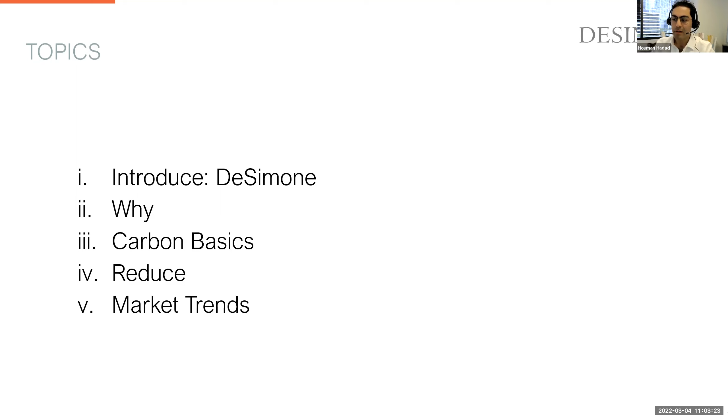So what we're going to be talking about is some introduction of the firm and myself. Why do we want to reduce embodied carbon? Some talk a little bit about carbon basics. Where does the embodied carbon come from? How to reduce it, and eventually some market trends and what is going on in the world that we live in right now in the construction industry.

DeSimone Consulting Engineers, we are at the core a structural consultant company. So what we do, we design structures — that has been historically the core of the firm, and even today the majority of the work. But we've been expanding into other areas, including structural design, facade consulting, forensic engineering, risk management, and other areas.

I'm very glad that at least for people that are in Miami, which I think is the majority of the audience, a lot of buildings that you know by name, including 1000 Museum by Zaha Hadid, Panorama, Paramount, Flatiron, the Twisting Tower of Grand Bay, and many more have been work of our company at the end. So we kind of helped shape the Miami skyline to some point, and I take pride in that.

So why do we want to reduce embodied carbon to begin with? If you think about traditional structural design criteria, we are trained to think about safety — by safety I mean occupant safety, against seismic events or hurricane winds or even gravity load. If you have a pool on top of the structure, you have to support it. So safety. Then you have cost, schedule, and constructability that go hand in hand. A project has to be economically viable to be built, a development, and then it has to be good to be constructed at the end of the day. And aesthetics goes without saying — no one wants an ugly building. So this is what we traditionally had.

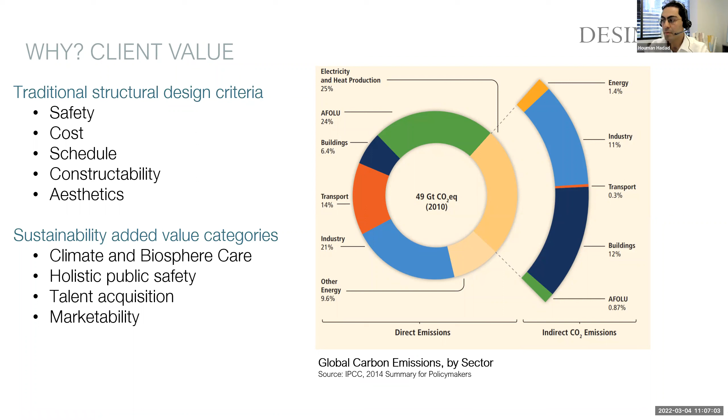The graph on the right shows the building sector is responsible for a good amount of carbon emissions, CO2 emissions. So if you're responsible for a good amount of it, we probably have some levers to pull to reduce it also to a good degree.

And then I go to the SE 2050 challenge. That is a challenge started by the Carbon Leadership Forum. If you're not familiar with Carbon Leadership Forum, Google it, go dig a little bit deeper. They have a lot of good information, a very well set up website, and it's very educational, really. So Carbon Leadership Forum started the SE 2050 challenge. The goal is to go zero embodied carbon by 2050.

And then ASCE SEI adopted that challenge. And now there are signatory firms that basically pledged to that challenge. Our firm is one of them. That list has grown ever since I had the list on my desktop, and a lot more companies are joining the movement, essentially.

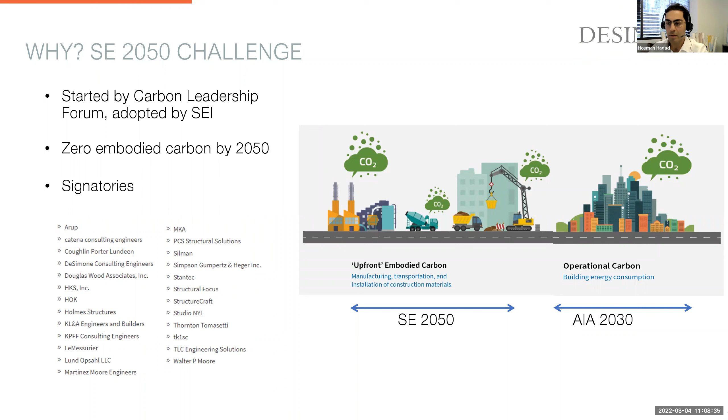I want to make a note here that today's topic is going to be about embodied carbon. By embodied carbon, we mean the carbon that has been released by producing the material that goes into your structure. We're not here to talk about operational carbon, although it is very important. But I think as a structural engineer, you have less impact on operational carbon. Operational carbon is the energy you use for cooling, heating, air conditioning, all the electricity used in a structure. We have more influence on the embodied carbon, on the material that is used to build a structure, essentially.

Now, let's talk about some carbon basics. I want to talk about three different materials that are most common in construction: steel, concrete, and wood, as three different structural systems.

First, we go to steel. To make crude steel, there are three different approaches. One is basic oxygen furnace, the oldest one. The way you do it, you have the iron ore, and you add coal, coke, limestone, and other stuff to it. You essentially burn fossil fuels to heat it up and melt it, and at the end you blow some purified oxygen into the mix to manage the level of carbon in the metal that comes out of the furnace, and that's how you have your crude steel.

The other more recent technology is DRI, or direct reduced iron. What you do is you're not burning fossil fuel anymore to heat up. You add stuff, you have direct reduced iron, and eventually you can add recycled steel, and you go to electric arc furnace, which heats up using electricity.

And then there's a third way of making steel, which is just recycling steel. The steel that has been used, you melt it again in an electric arc furnace, and you make new steel out of it, hot rolled shape, right.

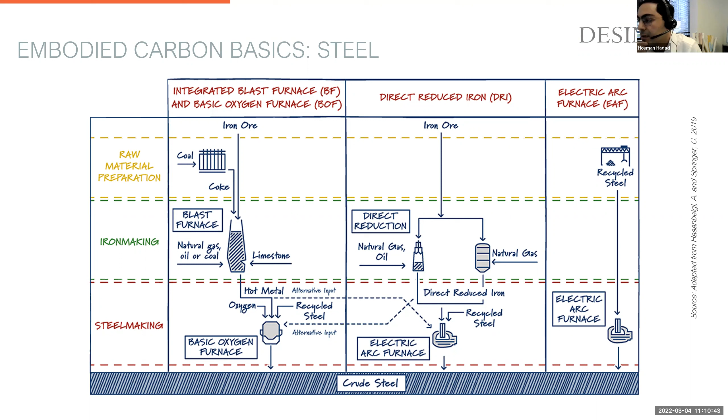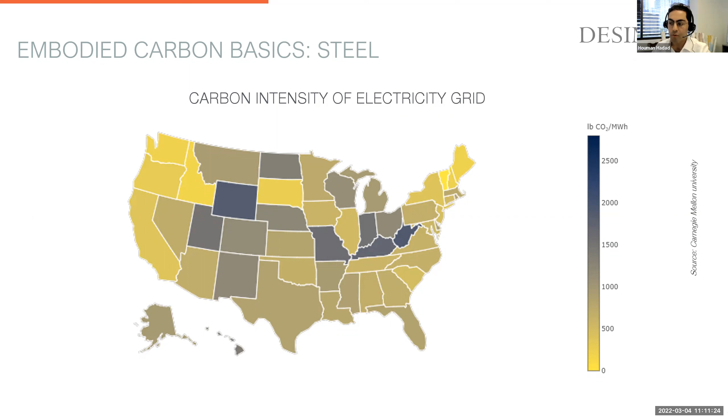Another thing to remember is that electric arc furnace consumes electricity to generate heat. So therefore, where your plant is, where your steel mill is located, is very crucial. Are you located in a state that has a clean electricity grid, like the West Coast or Pacific Northwest, or, as you can see in this graph, the Northeast region? The yellower in this graph, the cleaner the electricity grid system. Or does the mill happen to be in one of the states that is more carbon intensive, including the Midwest? That changes a little bit the equation of the steel at the end of the day.

Let's talk some numbers. For steel, on average, we have 1.16 tons of CO2 released per ton of steel produced. That is a high number. Reality is, for every pound of steel you make, you are making more than a pound of carbon dioxide and releasing it into the atmosphere.

That is obviously subjective. It depends on the technology, on the mill, where the mill is located. The number changes. A lower bound is 0.7 for a mill in the Seattle area in the Pacific Northwest, a Nucor using the latest technology of electric arc furnace. It can go higher for older mills still using the basic oxygen furnace.

Also, based on what steel shape you're using, the numbers change. To produce reinforcing steel, the rebars, it's usually made with electric arc furnace, and it's usually less intensive in terms of shaping and rolling. That gives a number close to 0.9.

I know that all of the W shapes in the United States are produced with electric arc furnaces. But when you go to cold formed steel and steel deck, it's mostly still produced with basic oxygen furnaces, and those are more energy intensive. So depending on what shape you're using in your design and where you're sourcing the steel from, the numbers can change very significantly.

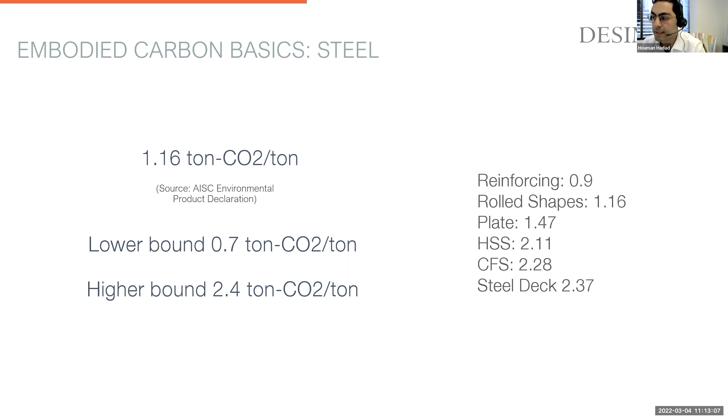From steel, let's switch to concrete now, and talk a little bit about cement. Again, we're just talking about carbon basics here. We're interested to know where the carbon comes from in each of the materials we mentioned.

So in concrete, what is the paste, the binding agent? That's the cement. To create the cement, you have to mine the raw material, make the cement from the clinker and cook it, then mix it in the ready mixer and transport it to your job site, and that's how you have concrete. The first two processes, mining and cement manufacturing, are responsible for 70 to 90% of the embodied carbon of concrete overall. So let's dive a little bit into cement manufacturing.

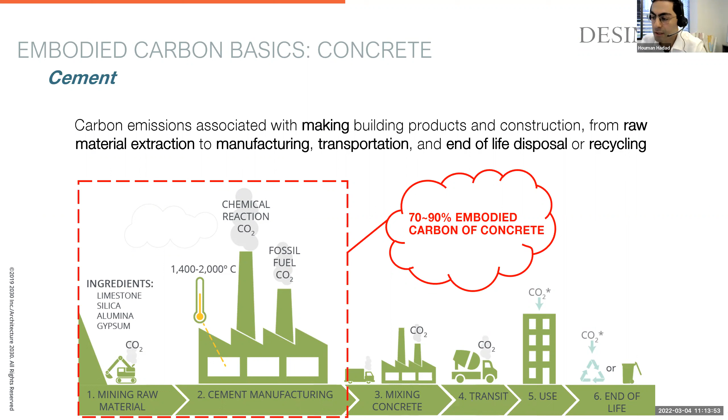Cement manufacturing starts with raw material. You have to crush it, dry mix it, then preheat it, cook it in a kiln, cool it down, store it, crush it, bag it, and then it goes to the customer. It's a little bit similar to how you cook a steak, really. You pre-season it, take it out of the fridge so it gets to room temperature, cook it, cool it down, and eat it.

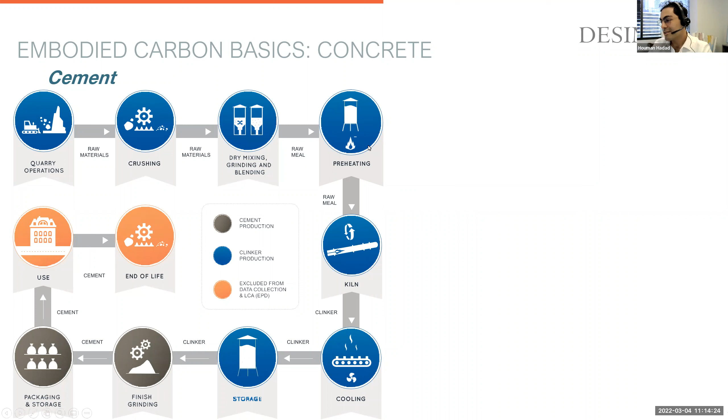For the two processes of preheating and cooking the cement, you have to generate heat. It's mostly either coal, or recently it's become more common to use gas, nuclear energy, and other sources like wind energy. So that's one way that you're releasing CO2 in the process.

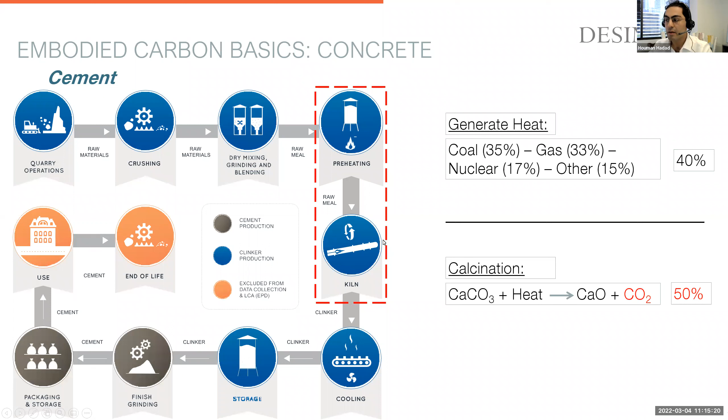The other way is through a chemical reaction, calcination in the kiln. When you're cooking the limestone, you release CO2 as an unwanted byproduct, and you end up with lime. That also releases CO2 into the atmosphere naturally, and that's sometimes more than the CO2 consumed just to burn or heat up the kiln in the preheating process.

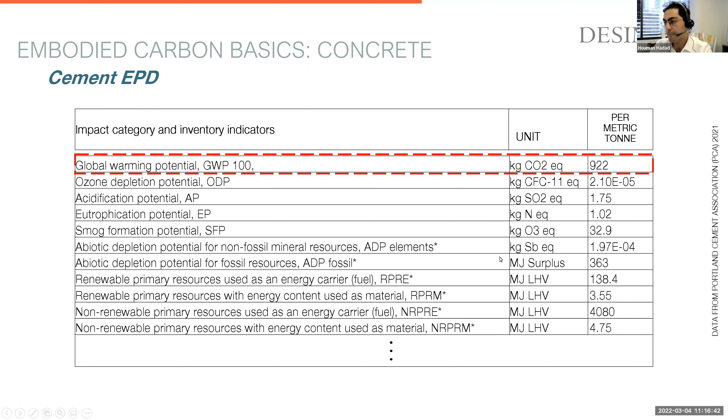Now from cement, if you want to go to concrete, concrete is basically a blend of cement and other materials, including the aggregates, the water, and other admixtures.

So a ready mixer essentially knows exactly how much of what material goes into a concrete. And they have EPDs for every single one of these ingredients, and they can do the math and come up with an EPD for the specific mix of concrete that is being released as a batch to a job site.

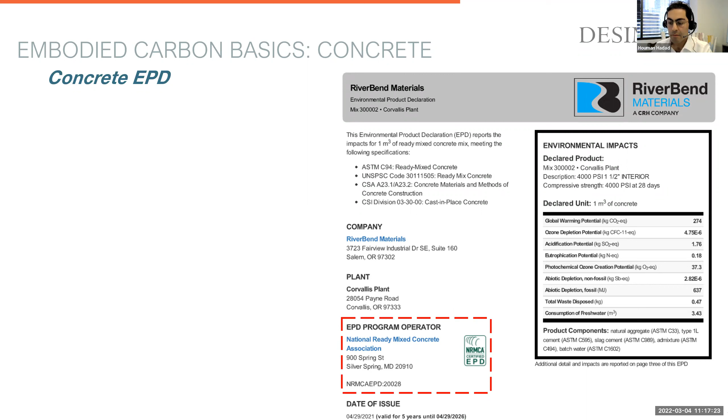Even better, they report all of that data to NRMCA, which is the National Ready Mixed Concrete Association, the association that really represents all of the concrete manufacturers. So NRMCA gets all of that data and creates a big, nice database, which is the national average.

EPD for global warming potential for cement and concrete around the country. They do that by having different classes of strength for concrete, and different cement replacement levels. Was it up to 20% replacement of fly ash? Was it up to 30%, 40%? Was it more or less? And they associate one average number to every one of these categories.

And these numbers are very important because eventually any of the LCA softwares that are working right now in the United States, they mostly rely on this data for the average of global warming potential for concrete.

Life cycle analysis, or LCA, that I mentioned before, is a very simple process at heart. What it is, is that you have quantities of materials and you have carbon intensity associated to that material. You multiply these and you do that for every single element of concrete, steel, whatever member that you have in the structure, and you add it all up to see how much carbon you're consuming for that project.

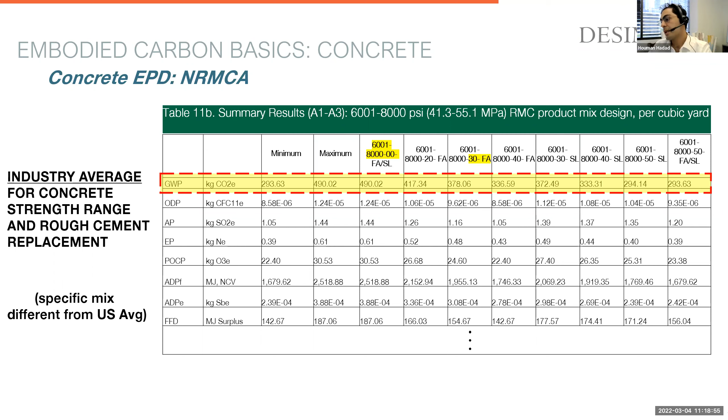So that was for concrete. Now, the third material that I want to talk about is wood, third structural material, which is becoming very fashionable these days, and a lot of people are interested in it.

The processing of lumber or wood is that you have harvesting, you have logging of the wood, then you essentially transport it. It goes through the process of milling. In the milling, it has to be debarked, rough cut, stacked, and then it's dried, either kiln dry or air dry, depending on the mill. Then essentially it's transited and ready for use in your structure.

If you want to talk about numbers of carbon intensity for wood, reality is that a lot of people say that wood is either carbon neutral, zero carbon, or a lot of people argue that wood, because it stores some CO2 during the natural life of the tree, they call it sequestration, is actually carbon negative, right?

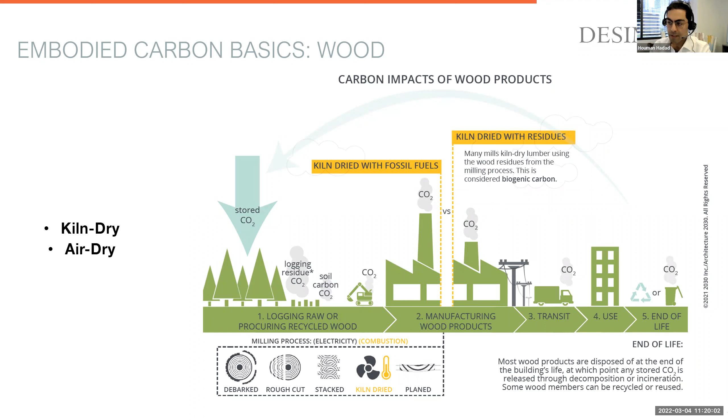There is some argument there because of two things. First, the wood that you're consuming has to come from smart forestry practices. It cannot be wood that results in deforestation. That's number one, and we're not even talking about carbon emissions yet.

Number two is that during the process of logging the wood and also disturbing the soil, some CO2 is released. How much is it? Definitely much less than what concrete and steel release, but it's not zero, it's some amount. And then essentially there's another argument that at the end of the life cycle of wood, either it decomposes or it ends up being burned if it's not recycled properly. Either of these two releases the CO2 that wood has been absorbing throughout its life.

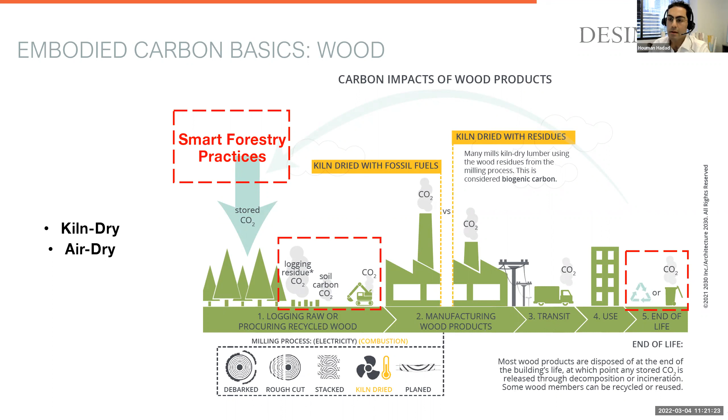So there's an argument that, all right, we cannot take every single wood that is in the market as carbon negative. It has to be a little bit more scrutinized. It has to be studied a little bit more and see how it is. But the fact at the end of the day remains that wood, compared to concrete and steel, is not as carbon intensive as they are. Maybe it's not zero, maybe it's not negative, but it's definitely not 1,000 kilograms of CO2 per ton of wood produced.

So now we talked about three different materials and how carbon intensive each one can be. From there, I want to talk about some reduction strategies in the real world. We have a project, you have a client, you are the structural designer, they come to you, and there's a goal of reducing carbon in this project. There are some general decisions to be made and some material specific decisions depending on the structural system to be made. In general decisions, I think the most important is to understand the team dynamic and reasons behind the reduction, right?

What is driving this project to reduce embodied carbon—either 10%, 20%, 50%, or go fully carbon neutral? That really dictates how the project is going to go. Is that a request from the owner? Does the owner want to reduce it because they are a sustainable person, or because they want to achieve a target limit for carbon dioxide to get a certificate? Or is it coming from the structural designer, us, and the owner isn't even aware of it and doesn't want to spend a penny on it? Is it coming from the architect? All of these really change the dynamic and how you approach a project that wants to reduce carbon.

The second important decision is specifying a carbon goal. So what is your goal? Assume someone wants to reduce carbon in the project, or all the parties together—what's the goal? Do you want to go overall carbon neutral, like Apple pledges to do now? Or do you want to reduce to a certain amount per pound of material or per square foot of structure, so you can use it in marketing later, or hit a certain certificate? Different reasons for it. That carbon goal is very important to set.

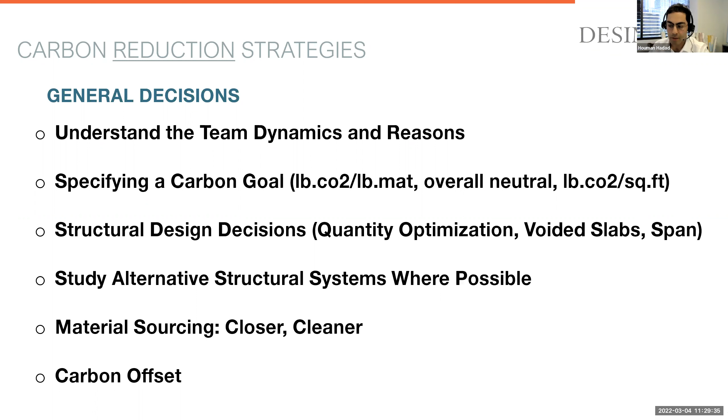I personally think carbon offsets can be effective, but you really need to be very conscious and smart about where you're getting them from and how you're using them. You're not just using it to justify yourself. I think it has to be used as a last resort, after you've exhausted any option available to you. You still want to go carbon neutral and you can't because the way a concrete structure works today is not carbon neutral, so you have the option of buying carbon offsets.

Now let's go to some material-specific decisions. The first example is a steel structure. What you can do in a steel structure to reduce the embodied carbon is, one, quantity optimization.

By quantity optimization, I mean obviously you have to be as lean as possible in your design. But also, when you have an option with a beam and you're choosing between different W sections, you definitely want to go with the W section that results in less weight per linear foot. That might mean the height of your section increases, so it needs more coordination with the architecture, vertical spacing, interior design, and other decisions that have to come into play.

Then you can play a little bit with the sourcing. By sourcing, I don't mean that if you're living in Florida, you can order material from California—that doesn't happen. But you can specify that you want recycled steel produced with an electric furnace for this project, and that's usually doable because there are mills available almost everywhere in the country that can deliver that material to you.

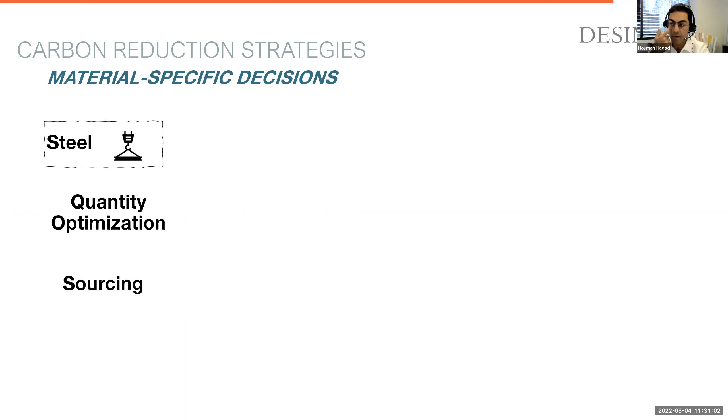Eventually, because steel is very dependent on the electricity and energy grid, at least in the United States, there's good news: the energy grid is becoming cleaner every day. In the year 2000, we started with 1,400 pounds of CO2 per megawatt hour of electricity produced—this is the national average. Today we are almost half of that, at 800 pounds of CO2.

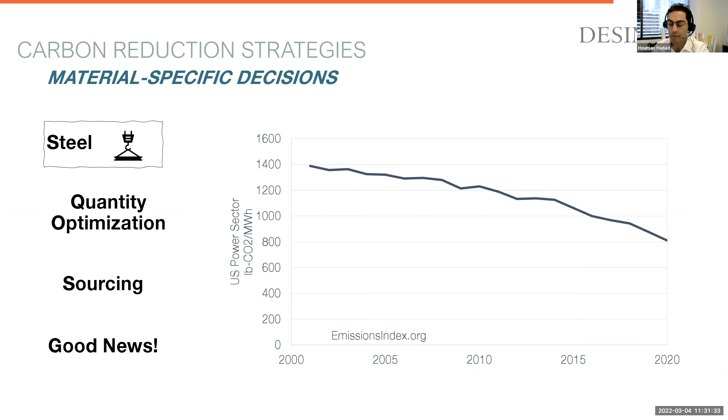And that directly affects how much carbon intensive your steel is, right? Everywhere in the country. So those are good news.

Then material specific decisions, let's talk about concrete. Whatever I really know here, I learned it from Dr. Suraneni, but I'll venture to explain a little bit of it to you. If you remember from when we were talking about concrete and cement, specifically baking the limestone into the kiln was where majority of the carbon came from in the concrete, right?

So the first thought that comes to mind: let's get rid of that cement as much as we can. One way is to use blended cements. Blended cement is very similar to ordinary Portland cement. The only difference is that some portion of that limestone is not cooked, it's ground and added later on. So it's less energy intensive. It can be 10 to 15% less carbon intensive compared to ordinary Portland cement.

Then you have the cement replacement option, and now we are talking about fly ash, slag, ground glass, and other supplementary cementitious materials, as they call them. It's a great option, but it has some complications when it comes to real design of a project. It's great in the sense that if you assume fly ash and slag are almost zero carbon intensive compared to cement, if you're replacing 50% of your cement with fly ash, you're reducing 50% of the embodied carbon of concrete. That is fantastic, and I think it can be used in many elements in a structure, including a foundation.

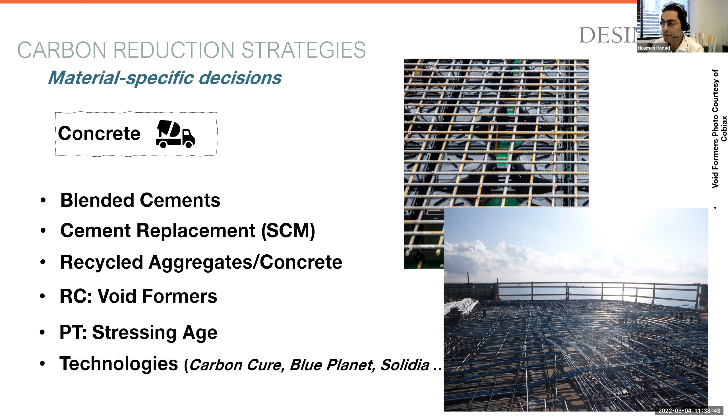You also have the option to use different technologies that are becoming commercially available every day. Examples are CarbonCure, which injects carbon dioxide right into the concrete. There's also Blue Planet, Solidia. Some of them use solidified aggregates instead of crushed stone aggregates. Some use technologies to make more efficient kilns for cooking limestone. There are different technologies, I can't go into every single one. Based on my experience, they can push the limit a little bit, around 2 to 5%, not more. They're not as effective as using blended cements or cement replacement, but that's been my experience. Maybe there's some technology out there I'm not aware of, I'd be happy to hear about it.

Last but not least, of the material-specific decisions you can make to reduce embodied carbon, let's talk about wood. We said you need proper forest management and sustainable forestry to begin with. That's a must, even without talking about carbon intensity. For that, there are two certification standards for any lumber on the market. Either they're certified by the Forest Stewardship Council, FSC, a certificate created by environmentalists, or by the Sustainable Forestry Initiative, SFI, a certificate done by the industry. You can guess that the FSC is more stringent and strict than SFI because it's done by environmentalists, but either of them really work well in our experience.

When you adopt lumber with one of these certificates and dig a little deeper, almost all the wood available in the US market ensures automatically that you're not taking your wood from a primary forest. It's a forest that's been created for harvesting, with a good rotation. Depending on the species of wood, the rotation can be 30-year, 40-year, 20-year, depending on what you're using. That rotation ensures the soil stays intact, and that the wood has enough time to absorb carbon dioxide during its life. It also ensures you're not using a lot of chemicals to grow the trees, among other good things.

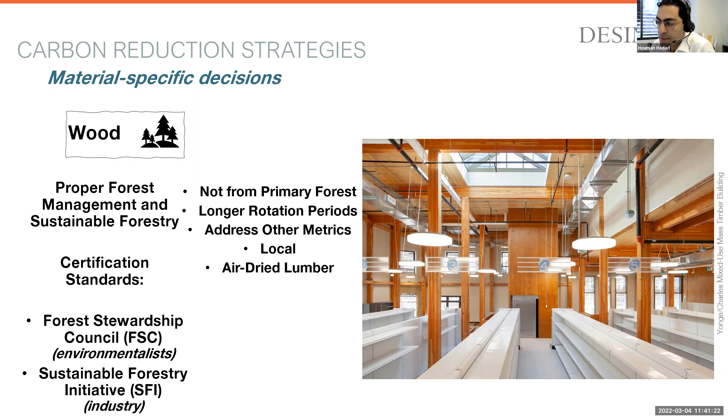Now I want to go to some of the market trends and what is happening in the construction industry.

There are three big initiatives affecting the construction industry. AIA 2030 is for architects to reduce embodied carbon and go carbon neutral by 2030. MEP 2040 commits mechanical, electrical, and plumbing engineers to net zero by the year 2040. And eventually, us, the structural engineers, committed to net zero by 2050. There's a long way to go, and structurally it's the hardest part because most of the material used in a building is the structure. It takes a lot of technology to come in before we can reach net zero. We've committed, but we shall see how it goes.

There are some good green building certifications, including BREEAM, LEED—probably the most famous—and carbon certification. These are the three most famous, but there's a lot more, like the Florida Green Building Association, which gives some certificates. All of these, in their latest versions, have incentives for reducing embodied carbon, and also incentives for just running a life cycle analysis on a building. This is really good because a lot of buildings we do target one of these certificates, and in turn it incentivizes them to reduce carbon emissions.

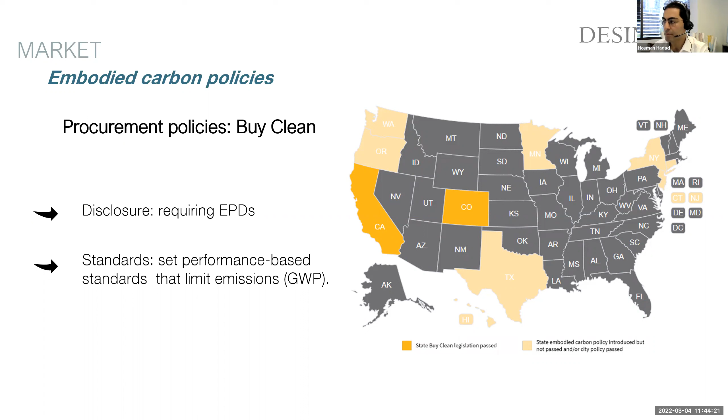There are a lot of cities that, as a jurisdiction, have adopted initiatives. I know Portland, Oregon, Seattle, and many other cities have requirements for city projects to have a limit on the amount of GWP they use per material. They require EPDs and much more, but it's not all shown on this map.

Let's talk about the big players in the industry and how they're approaching carbon neutrality. Apple, Amazon, Facebook, Microsoft—all of them have pledged to go carbon neutral by 2030 or 2040. That's important because Apple, Amazon, Microsoft, and even Meta have warehouses and are heavily involved in construction. When they commit to going carbon neutral by 2030, and they've already started, they are, in my opinion, forcing the rest of the construction industry to follow suit.

They're also breaking ground in a lot of R&D, if you want to call it that—the first time for a building to go carbon neutral, in a lot of the projects they do, granted that much of it is warehouses or maybe Apple stores in the case of Apple. But I think these are great pilot projects in this new era of reduction. A lot of other developers, contractors, and structural engineers are just going to get pulled into this atmosphere that Apple, Amazon, and Microsoft are creating. And it's a good thing.

That was my talk. I would be happy to hear your comments, questions, and answers. As someone practicing this, I know a lot of you are experts in materials, and I would love to know your opinions and suggestions on a lot of what I said.